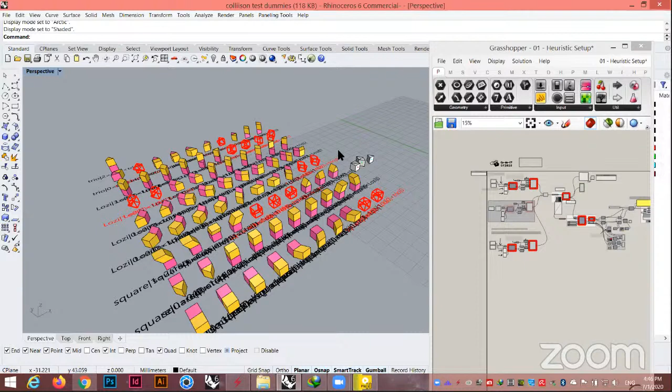So, who is in group with you, Sarab? No, Alberto. Sorry, Shermin, sorry. Yes, Alberto? Yes, here. Do you have anything on your own? Yes, it's another option over the same stuff, but I can share it if possible. Let me make you co-host so you can share.

Okay, you should be able to share now. Perfect, I'll share screen. No, here. Yeah, I'm looking at it. Well, let's reset this stuff firstly.

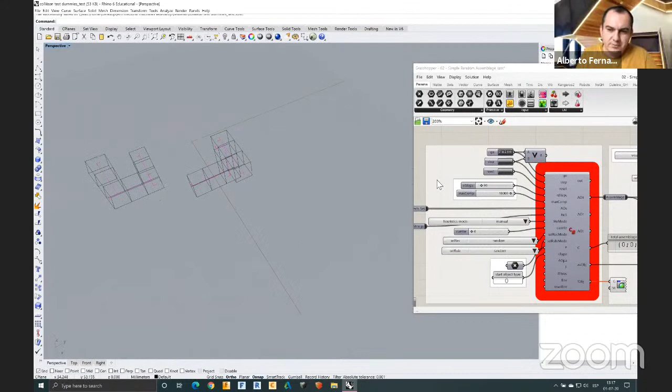So trying to get another approach over the same issue of patterns, I created something like this, and then with two different movements, and then playing a little bit with the code, and then proposing 5 handles in each model with the same size, it's possible to get something like this.

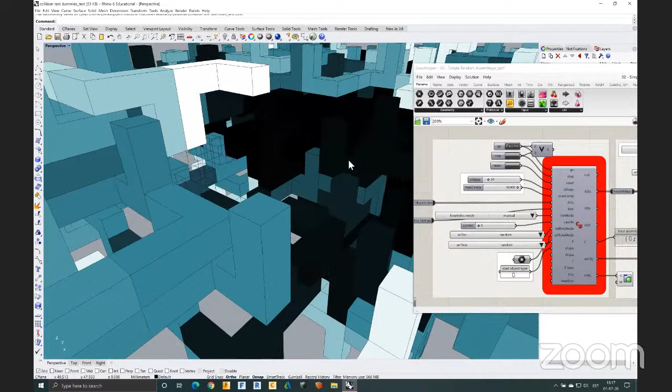See if this is working. Oh, if you hit go, it will probably be okay. Go, yeah. No, but it should be light enough if you're... So it's happening something like this.

Which at the end is trying to find this idea of patterns and repetitions, but playing with some variations. In any way, it's probably possible to mix this idea with the other one, which is these angles, which is prisms or triangles, and then see. But we must mix all these two codes in a single one, I think.

Yes, I would feel like at this point, after seeing your contribution, I would like to give you a bit more pointers, some more pointers to add to what I already said to Sherwin.

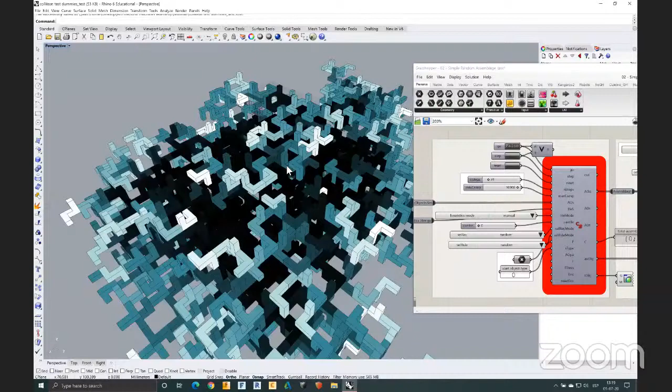In your case, your components are articulated, but their sense of anisotropy of directionality isn't really coming forward. What you get, if you switch the visual to object only so they're all the same color, you'll realize this even better. You see it's like this articulated, complex, Menger sponge kind of object, but you don't see those patterns of directionality emerge because there's little anisotropy in the geometry of the component.

So one of the possibilities to activate this kind of anisotropy is changing the proportions. Just think about the bounding box of your component. You make a bounding box of your component.

Reaching anisotropy, achieving anisotropy can be done in several ways. If the connections and handles basically lead to a sort of cubic grid, that's one thing. The other thing would be considering the bounding box of the component. If the bounding box starts to look like a cube, then most probably, well it depends on the geometry, but most probably the anisotropy is not yet there. The fact that all the angles are 90 degrees also isn't a fundamental factor, but it adds a little bit.

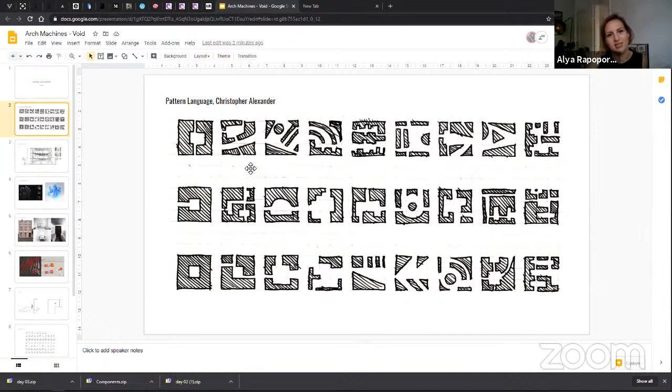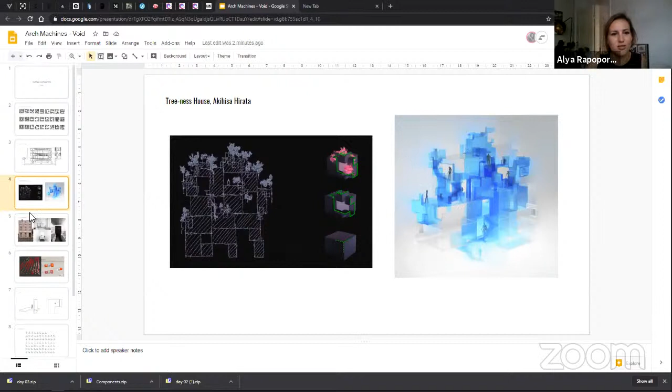So here we're coming back to the pattern language of Christopher Alexander, or looking back at the Salk Institute of Louis Kahn, where you can see there are normal room spaces but also interstitial spaces, creating different volumes inside. Another reference is Tree-ness House, the combination of solids and voids. So this is what we're looking at in our topic.

Then you said it's important to see the progress. So we were trying - my first attempt was like almost everything is red, so almost nothing worked. Then at the end, or now in the process, we came to two components.

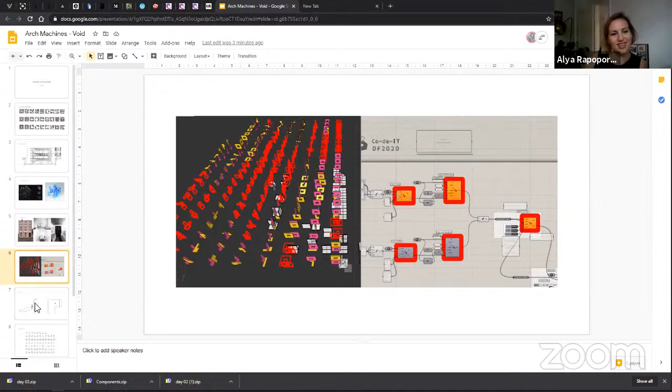We decided not to go with this Amazon box that you described yesterday, to have a series of boxes or shipping containers, but instead to try to find a component which would in itself create this space, with maybe windows or weird spaces looking outside. So far we're only at the very beginning of testing.

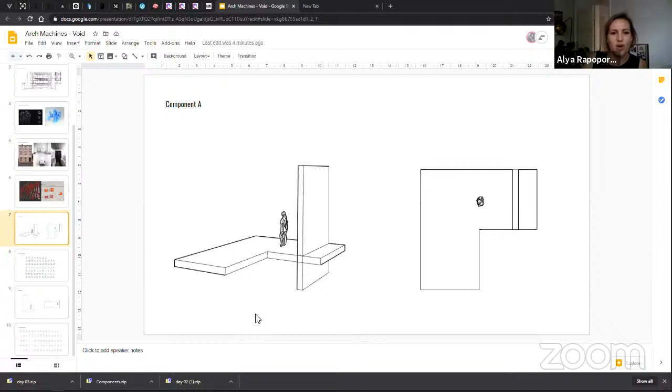We came to component A, which looks like that, and this part we think that when it combines with the other ones, maybe there will be spaces like a vertical shaft or window or a hallway, and these are the iterations of the first one. Then it would probably be interesting to combine it with a different one to see how they will arrange.

And then from here, Nora will share her screen. Okay. Can I do it? Oh yeah, I can do it right away.

I made you all co-host, so you should be able to do it at will. I hope it won't crash - it's a bit slow. Okay, I can see it. Yeah, you can see it? Yes, yes. So where is it? Oh, maybe this is not the right one to have.

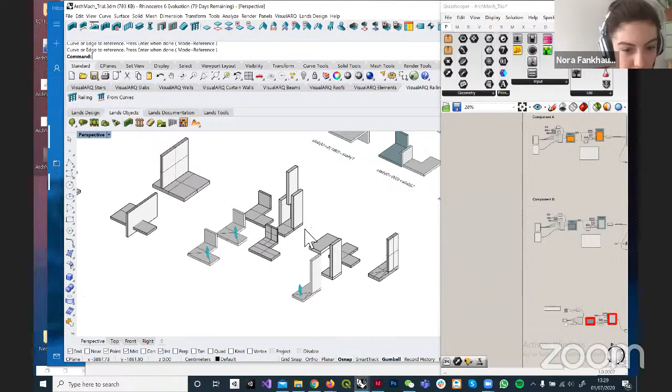So yeah, these are the two iterations. We started with this component basically. That's how we developed - we cut out an edge and then we added slabs on the sides. Basically, first not to have the definition of a room, just that if we cut this out, we could look down, as we just tried to think architecturally. So this is the first component.

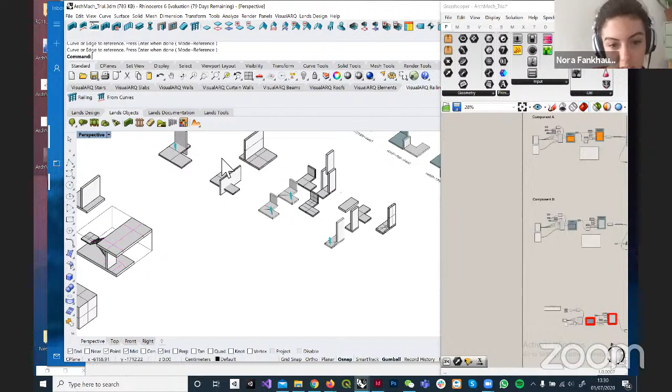And then next step, we're gonna probably try out with this one, jumping from this to this, and then this B component is this one. So for now, we just started to aggregate it. For now we have these ones. We're trying to figure out which are the good connections, because actually we want to find connections that when they come together, the parts kind of already form a space and not just flat like this.

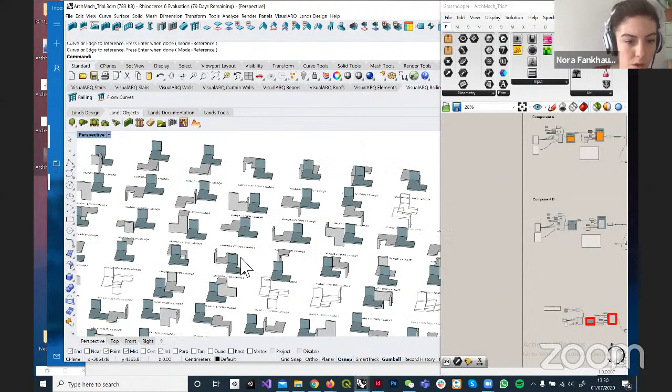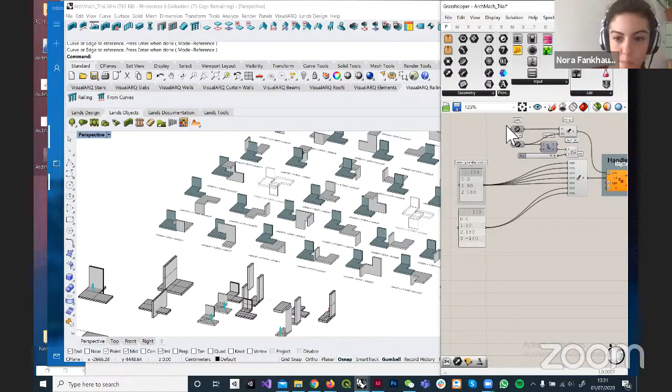So I don't know what the right process would be - just to pick a few and then elaborate more rules for the connections or for the angles. We have here those components. We didn't play around too much, but maybe we can do something with the angles, or replace the handle for both parts, for both inputs here.

Yeah, this is what I found the most challenging for us. I found this is actually trying to understand where to put the handles and how. What is the smartest move for that?

Yeah, that's quite something. Nora, can you leave the screen? Just minimize Grasshopper and zoom in on the heuristic table as much as possible. So maybe type - can you type in the Rhino command line full screen?

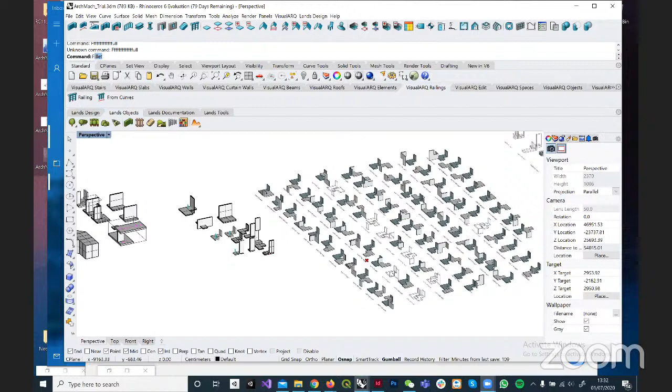Okay, okay, sorry, okay. Yeah, all right, all right. Where do you want me to...

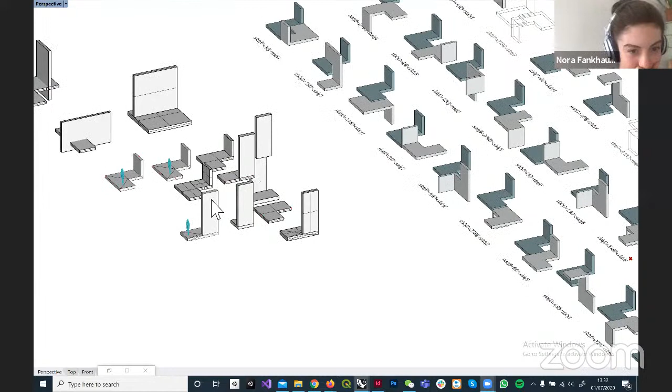The handles, the table of heuristics, so all the combinations. Just this part over here, the small part over here. All right, yeah, great.

I'm just looking to see if there is something in there. But you're right, looking for things like this. I'm looking, I'll tell you what I'm looking for. I was looking for this guy here.

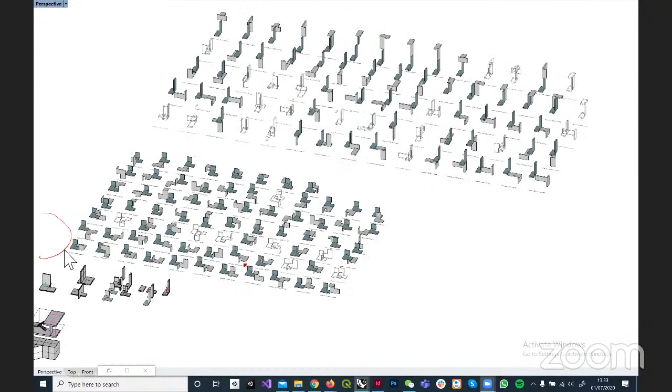So it's there, okay, yeah. You already thought about it, but the way you place the handle, is the kink on purpose? Is the step on purpose between them, so they are not exactly coplanar? Yeah, that's true.

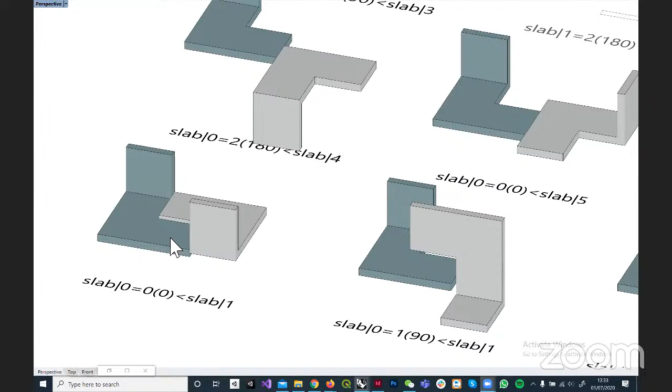Okay, it's interesting because I think in your case there are a lot of selections and tests that you have to do with the handle placement. So can you make a little white space on the screen so that I can sketch there?

Okay, that's quite okay. Or did you want it close to the component? No, that's fine. What I'm saying is, let's see the things in plan for a little bit. So you have your complementary component that can do this also, right?

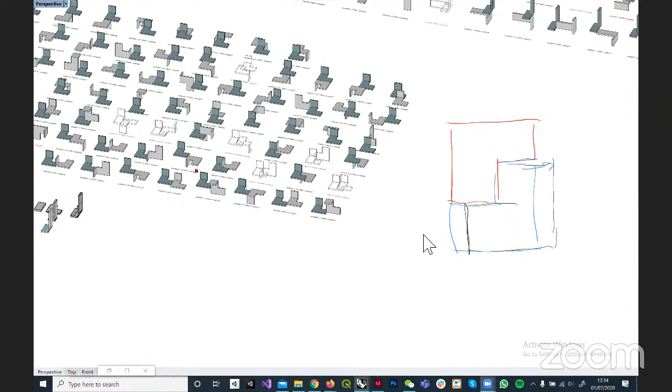So if you shift a little bit something to this side, what you can get is, let me see, a little gap in there, right? Yeah, and then when you assemble the rest, it will start from here and make some other gaps.

And then you can see how it works in the third dimension with an additional rotation of the components, and start making assemblages just by filtering some rules, but trying to go on and maybe see if they react to a vector field, or even do it in stages—use a single or a couple of rules that work well together for a certain stage of building the assemblage, then save it, then load it as a previous assemblage and use a different set of rules.

Okay, and try so that you can differentiate the areas. You can grow in stages or grow in parts, it's up to you. So you gain a little bit of confidence with this.

It's going to be interesting also because then you might also have the possibility—I don't know, that may be too much. No, that may be too much. So let's see how we go from here with this.

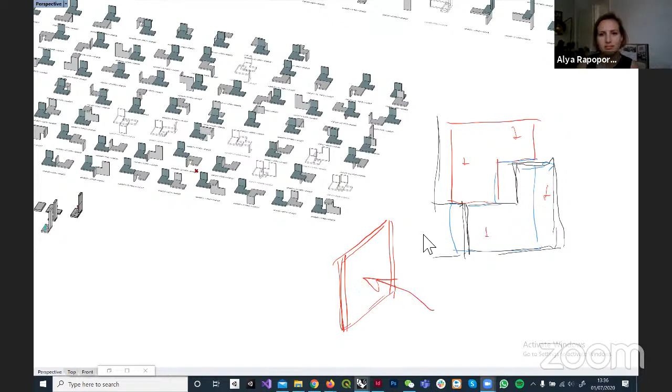What is it? I was just speaking my mind aloud—the basic idea was, what if you had a third component which was just a single slab? But then you place some handles of a certain type just for this guy here. You know, you have like a type 3 handle, or I don't know how many types you have already.

But you basically have just a type 3 handle, and these guys are just type 3 handles. So at some point when you assemble things, you can put also this thing. Or you can have placeholders in the component and add this sort of element as a post-processing thing, so you can locate areas, enhance density, or do some sort of post-processing operation that will...

Oh yeah, another thing came to my mind, and this is something that I'm not seeing here—to allow the components to accumulate, flat face over flat face.

Yeah, true, we didn't put the handles on the top. So yeah, let's say that you have this object—I'm simplifying things a bit, okay, that's not your component, but it's just for demonstration. Let's say that you allow another object to do this.

And behind the back of the other is something like this. So they basically can stack up one over another. Okay.

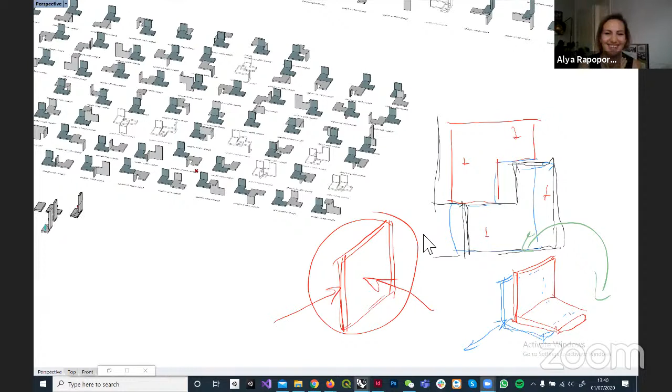Okay, and do you have a tip how to really fast and smart place all the handles? Not so much, it's not... You're already on a good path on placement, but think about exactly what I said.

Just start. You can start with the obvious, and then you can start by playing with this offsetting or sliding the parts one way or another, or using the spots that you have. For instance, the spots on the edges, so that you allow yourself to use also the thickness of the components to connect to the edge. So you have, in sections, situations like this one.

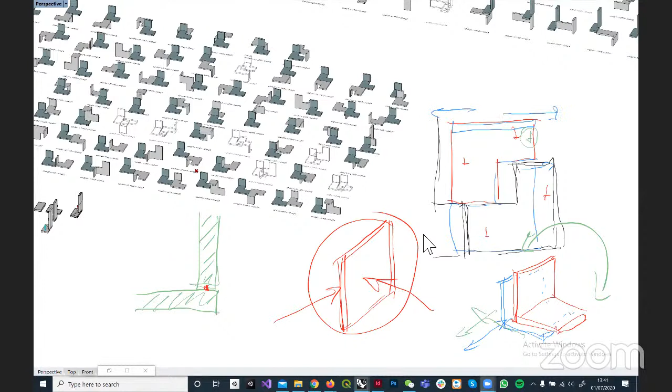And you get this one by placing the handles in this position, like half of the thickness in from the border. And then according to the position, you can have your elements go completely coincident, or again, you can slide them a little bit one way or another so that they are basically almost suspended, and when something else comes in that doesn't conflict, they might be complemented by something else.

Great. Oh, is the screen frozen? No, no, sorry, no, you can move around. I mean, you didn't sketch anything more. I didn't sketch anything. Oh no, okay, sorry, I'm getting a mini heart attack. Okay, very good, okay, we got it. Okay, thank you. Thanks, welcome.

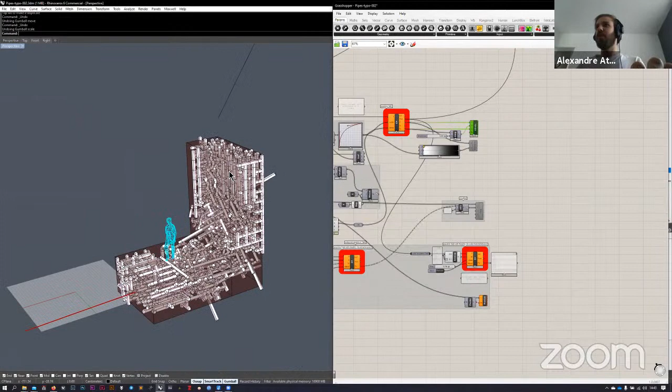So I just scaled down a little bit my main component, and I tried to add some 45 degree angles in the pipe connections. I also increased a lot the size of the bars, the big straight bars. And now I modified a little bit my vector field in order to have it on the x-axis, then it became random, and then it goes on the z-axis in order to make some interfaces with some other blocks, or the same.

Alexandre, can you just hold for a second? Just one quick technical suggestion: I think your field has a resolution that is way too high. You can reduce the resolution, make it with a lot less points. Yeah, I will do that. Okay, just this, yeah.

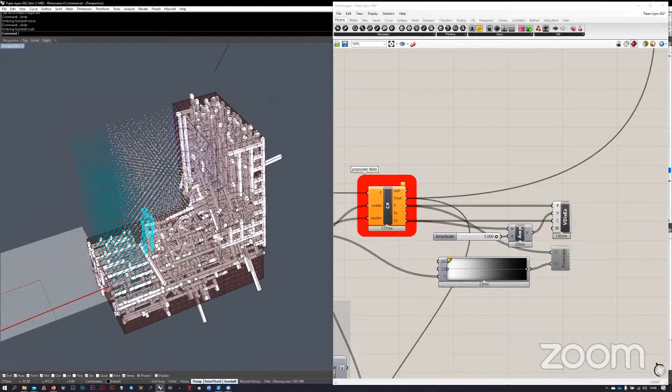And then I just tried to see how two of these blocks can connect. So because of the crazy density of the thing, we don't see any problem at the interface in the middle here.

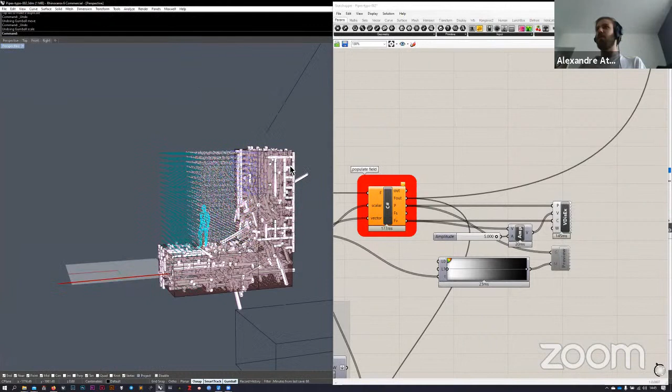But now I really want to manage the density a bit more, and with what Jan will say just after, we'll see some more oriented blocks, like profiles that can go this way, or with some angles, but this is more of Jan's work, this part.

I think I still have a lot. I have one problem, which is that I cannot use the human plugin. I cannot select manually the selected preview.

Double click on the lock. You have to, sorry, this is something that maybe I forgot to say, but I think you also have to enable the preview on that component.

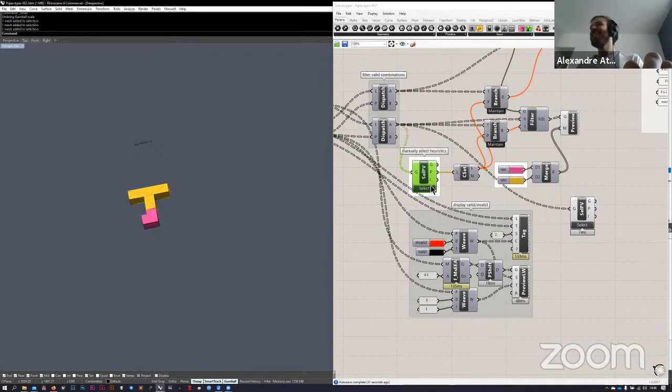Like this? Yes, you should be able to select now. Oh okay, that's it. Okay, and so I also noticed that it might be that sometimes when you open a definition, that component is flashing red.

In that case, you have to substitute it with a new instance of the same component. You just drag it from the Grasshopper interface, reconnect it, and with the new component you should be good to go, in case that happens.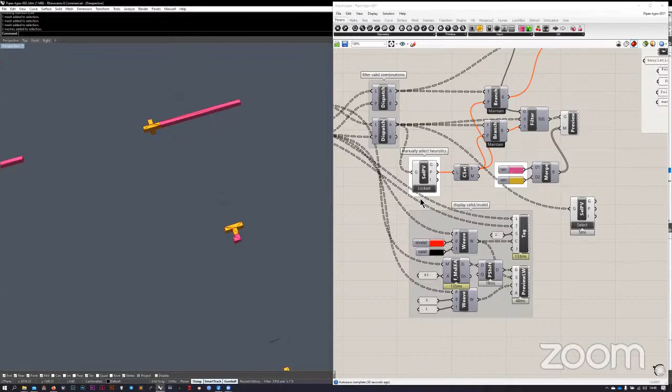Okay, I see. So now, because I have... Yeah, I think I mentioned that you have to enable the preview, but I mentioned it pretty fast, and it might have gotten lost in the streaming. Okay, don't worry, it's okay.

So this will be a way for me to manage it, because I have a crazy number of combinations. So I will try to drastically reduce that.

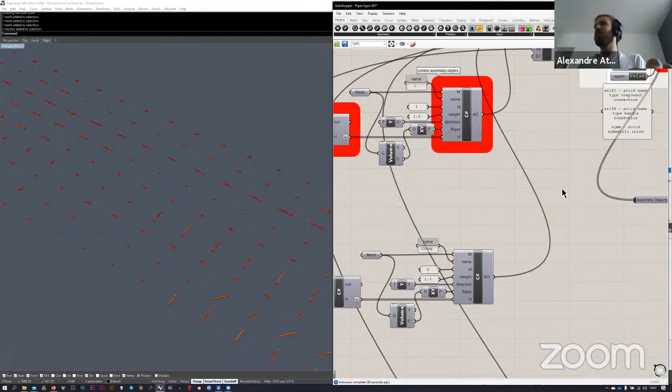And do you have a lot of rotations in there, by any chance? Yeah, I have too many. Not always, but it depends on the block actually.

Because if the block has at least two axes of symmetry, two central axes of symmetry, you can basically keep the rotation at 0.

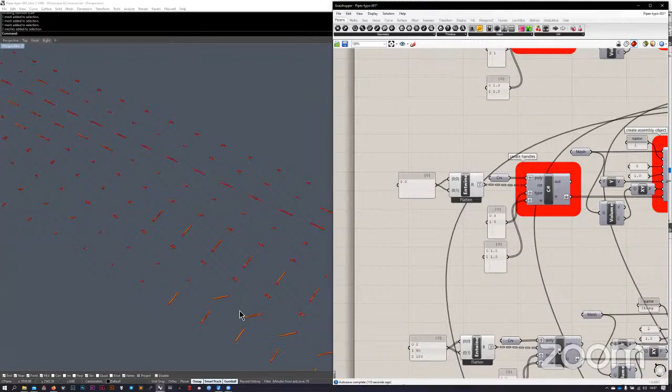Or I could just also... try, because the symmetry can cause you some troubles, because in some cases it might be that the symmetry filters out the possibility of a component to be a receiver, and then one component becomes only a sender. Okay, this is something that I realized, so I have to improve this kind of symmetry filter.

The first part where I would act, if I were you, would be into reducing the number of rotations to the bare essential, or to something that actually really makes a difference, because otherwise you will notice that you have a lot of identical combinations.

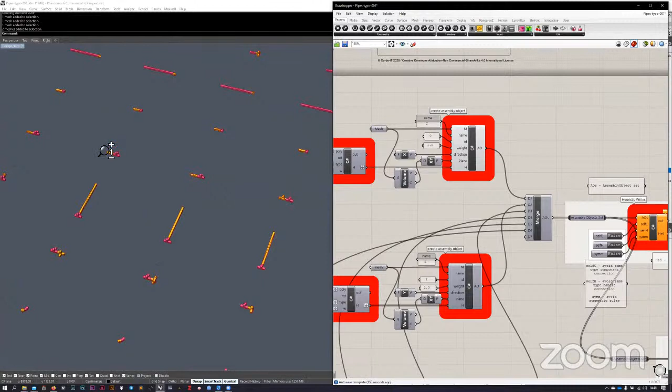Yeah, here I see I have a lot. Yeah, these are all the rotations of 90 and 180 degrees on a square figure, so it doesn't change anything, right?

Yeah, but just a question about that. For example, on this connection here, should I keep different levels of rotation or not? Because this can be oriented in different ways and it will change. Yeah, but I think there you have like 3 rotations that make a difference.

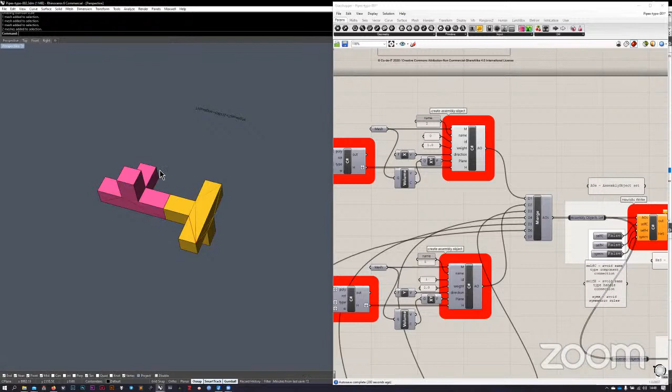How many? Probably 3: 0, 90, and 180. Okay, because then you will have, I think so. But you could make a different type of handle for that, or just give...

...the same type of handle, but just give those rotations to those handles in that kind of component. I mean, the stick, I would really keep the rotation of the stick to 0 degrees in both. I kept 0 degrees here.

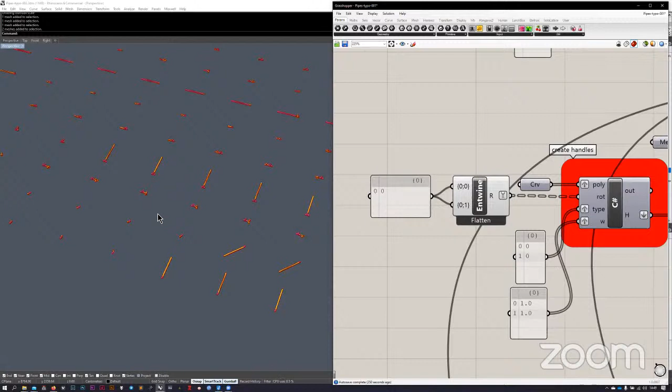Okay, so probably a good idea would be to make 2 different handle types in the same position. So one handle type is for the connection of the T-shaped components to the other T-shaped components, and then you enable the rotations. The other handle type is just for the stick, where the rotation actually doesn't count.

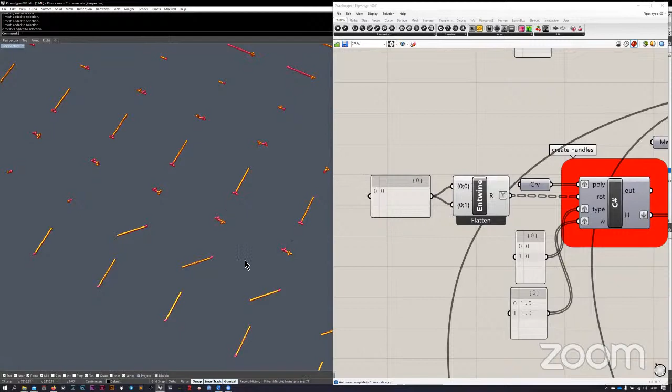So I think that would solve the problem of redundancy in all the combinations, because otherwise you're literally looking for the needle in a haystack, almost literally. Yeah, I agree, it's too much.

So yeah, I think for me, this will be all. Just some quick references if needed. But it was about, I had this kind of pictures in mind. Like, why doesn't it...

Yeah, so maybe Jan, you want to? Yes, I would like to see also if Jan has something. Then I will make a commentary on both of you. Okay, I will share the screen with Grasshopper and Rhino.

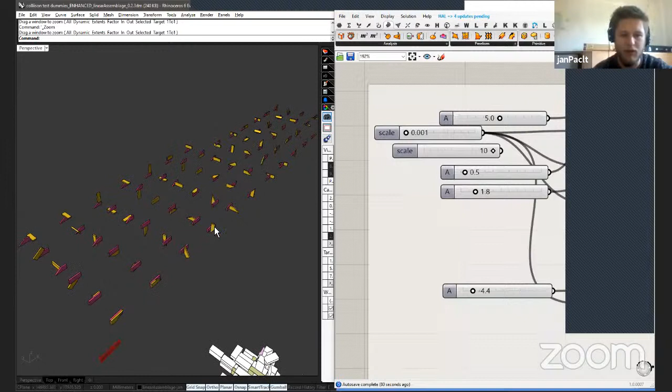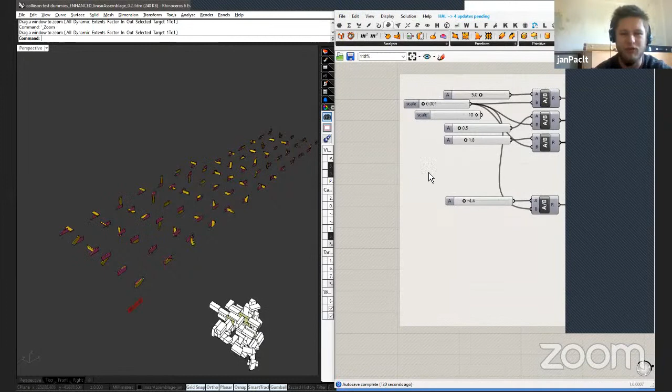So I shifted from the linear elements, which I tried to explore, because I actually want to make space for Alexander's elements. So as Alexander showed these red boxes, I am now developing the language of those boxes. I took one step, maybe that's procrastination, but I wanted to get a sense of what kind of spaces I can generate with different objects. So I parameterized the boxes, I can change the proportions of them and some angles and stuff.

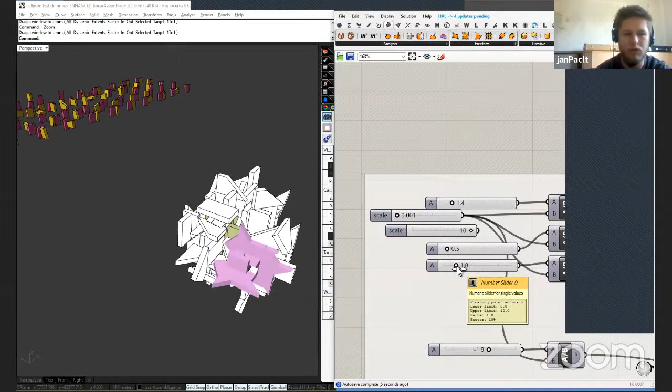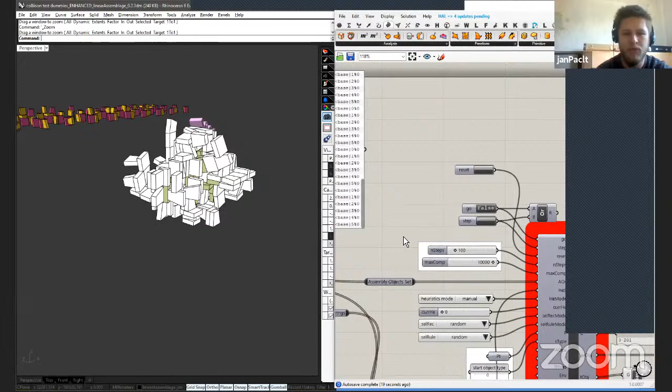Then I managed to populate and make the assembly. For example, here I can see it creates something like slabs. If I change the proportions to something more like boxes, then it has a different character, and I want to use this tool to create interesting spaces for those pipes which Alexander is designing. So far it doesn't have much sense in terms of connectivity, so I'm going to stop this exploration and focus more on precisely designing the handles and stuff. But so far that's what I got, and I can also show the reference.

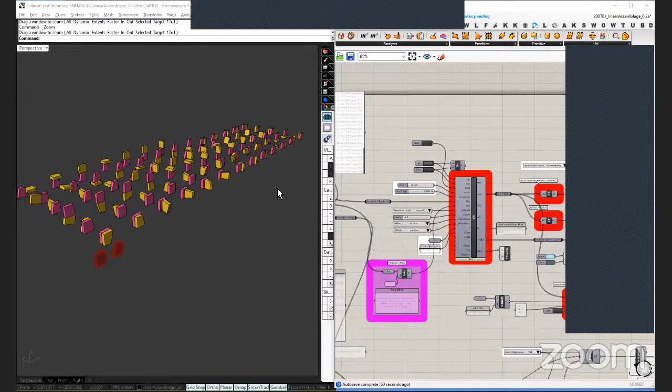Let me change the screen, maybe if that works. How do I change the screen? Second. Can you see the image? No, maybe you're just sharing the Rhino window and not your screen. I'm still seeing Rhino and Grasshopper. Okay, and now? So if you share, look if you see something. Okay, now I see the picture.

So the idea is that there are some denser areas. Eventually I would like for each object of mine to create some kind of value for Alexander, so then he can populate it dense or less dense or more dense based on this value. So I want to create this generic structure.

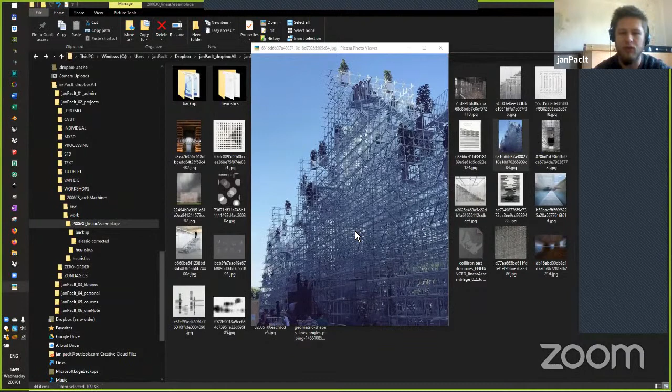Maybe play with the transparency. I'm not that sure if I can manage, but then the density will be added by the detail of Alexander. So that's for me, I guess, the progress.

Just to add a little bit about the density that you said, we said when we were speaking together that maybe for my part I could have several versions of the same assemblage. And then when Jan is doing his own big assemblage, we can dispatch some instances of the blocks according to, I don't know, attractor points or things like that, to replace the global geometry which he designed, with one of my different versions that is maybe very dense, a little dense, or very light, things like that.

Yeah, okay, that's along the line of what I had in mind when you did the proposals. Can either of you share the screen with a blank screen so I can sketch like on a canvas? Because otherwise I cannot share from my tablet and sketch on it. Otherwise I would do that. So just maybe an empty part of the frame. That's perfect, that's okay, that's fine. Okay, so—

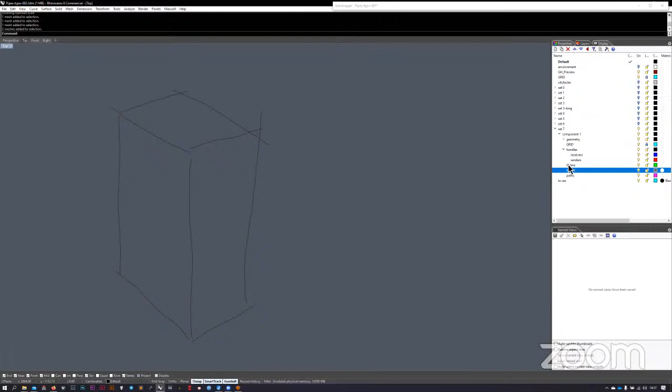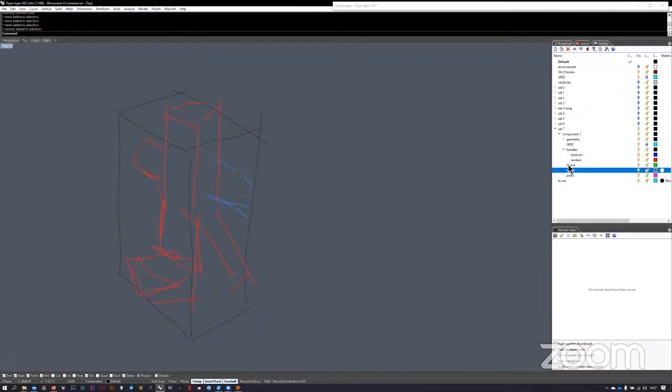One of the possible ideas would be to start with experimenting with a few but large-scale objects—they don't have to be too many, but a number around ten or something. So you create different versions that have different possible handles, or try to do something that, as much as possible, doesn't have too many elements, but has connection points that can be used and be modular with other objects on the same side. So in the end you have a macro object, and you can place some handles to say, okay, this is the row configuration, and it doesn't matter what happens in here—we have the possibility of connectivity right here.

But depending on what we decide to put inside the object, something will connect, something else will not connect. But instead of a huge cloud of stuff, you have fewer elements but larger. So if your stick is something like this, you can design also another element, which is a larger pipe that has a larger section. Up to you how much contrast you want to introduce into the difference in section. And then you can design intermediate components that handle the change of section from one size to the other.

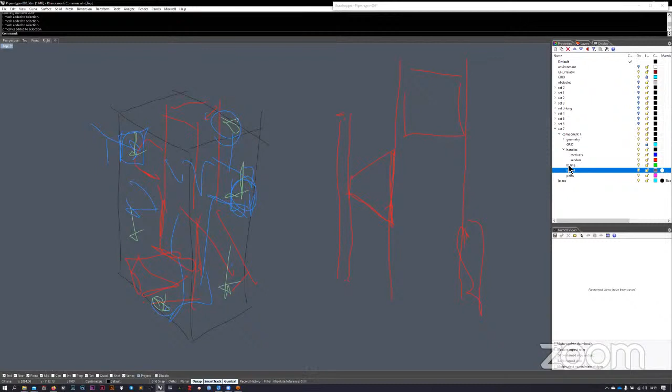Because then when Jan tries the volumetric assemblages, you can start by placing the rough big pipes, which will have all these possible positions for adding joints. And then once you have part of the assemblage, you can start populating it with more or less dense assemblages of the smaller parts of these.

Do you get what I mean? You can work in density locally. Let's say you drive density through a field, through a scalar field, through a vector field. But then you maintain the possibility of enabling a combinatorial assemblage of larger elements that will then acquire even more differentiation when you start populating it around with the smaller ones.

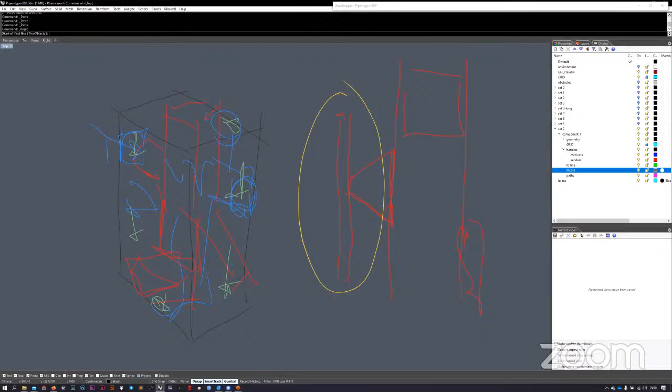So technically, you can have the first set of heuristics and pieces that are the larger assemblies, the larger pieces. Once you have laid those in place, you can start from those as a previous assemblage, and then you add to the set and you work with the smaller ones, rules that only involve the smaller ones, and these components to transition from one scale to another. So you don't add any more large elements, but you use the large elements as a basis, as a placeholder to start the other densification in smaller scale.

So you work in hierarchies in your structure. Okay, yeah. Those will be like some sort of a frustum geometry right now, literally something like this. Okay, yeah, I see. From a bigger square section to a smaller square section.

And just, okay, no. The thing is, just a question.

Everything that is in red for you, it's Jan who is designing this. Oh no, Jan is designing the volume in black, and then of course he can help you designing also the things in red. Let me use just the green. This one, the smaller one is in red, but it should be another color because it's a different hierarchy. Okay, I think I understand you. I'm out of colors, I have just 4. Sorry, okay, no but okay, it's right, yeah, that's it, okay.

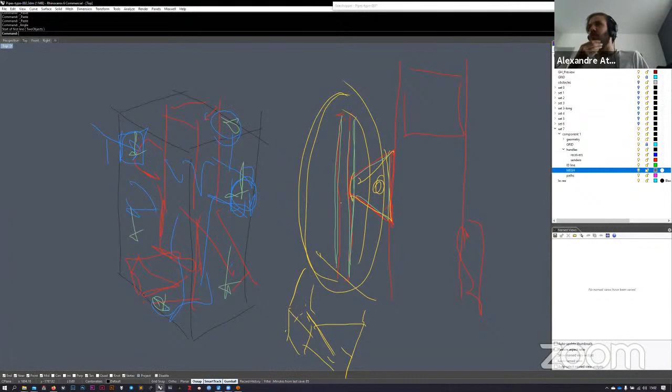So I think the basic idea is to try to capitalize on the fact that these objects that you design with the rough initial few large pieces, they can still be modular when you distribute them in the assemblage. So they will form a first, still heterogeneous grid, but based on combinatorics.

And then you add another layer of complexity by acting with this additional assemblage of transitional and smaller scale elements that add a further hierarchy, and then you can heavily differentiate things locally, even with a vector field. So if you want in some places to privilege a lot more diagonal connections starting from these pieces, or more vertical, more horizontal, increase the density, it gives you that intermediate placeholder grid of elements that then will be not just a regular grid, but a grid generated with the assemblage of the larger volume pieces.

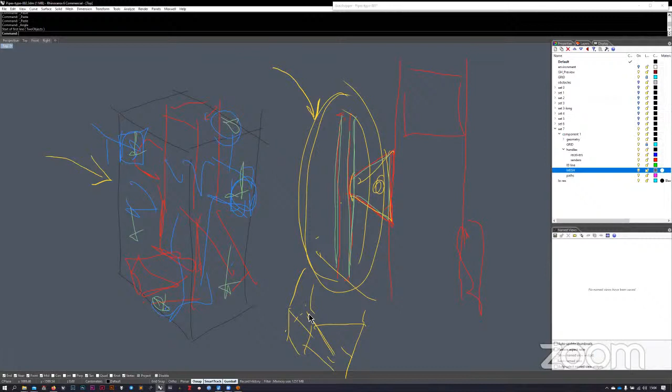Okay, I mean you can even design this as a module with the handles for the placeholder. You can even design like 3 or 4, even manually if you want. They don't have to be especially generated, because then the rest of the thing will be done in the phase where you actually start the assemblage of the smaller pieces.

I see, okay. All right, yeah, thank you. Interesting direction.

All right, who's presenting next?

May I show something? Sure, yeah, sure, I'm going to share my screen. Okay, can you see my screen? Yes, I can. Okay, perfect.

So I got some pictures which I got inspirations from, the game named Monument Valley. It's also, all right, yes I know it. Yeah, yeah, so I got 2 components.

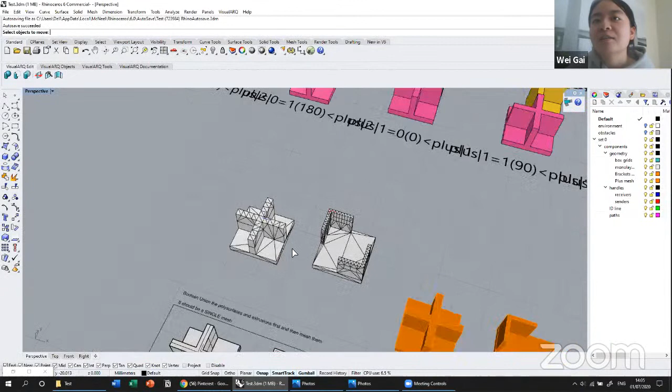So it's like, so when I'm trying to put them together. Yeah.

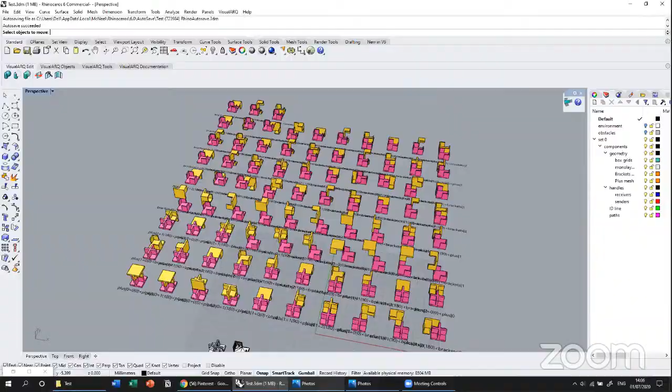One thing, can you show again the first picture? This one? Yeah, this one. Can you notice anything missing in your components? The stairs, maybe. Yeah, exactly.

I mean, this, or even do you know those Indian temples? They were like wells, then later became temples too. The Indian stepwells or temples, called stepwells because of the well. You know them very well, Sarab. I think they are beautiful pieces of architecture, for me.

They were actually one of the inspirations for a topic for one year in my course at the university, because they were a very interesting intertwining of not just having vital access to a resource like water, but that became the occasion of building something that extended to social rituals, to society, a place intertwining access to a necessary resource with the rituals and daily life of the entire society gravitating around that part.

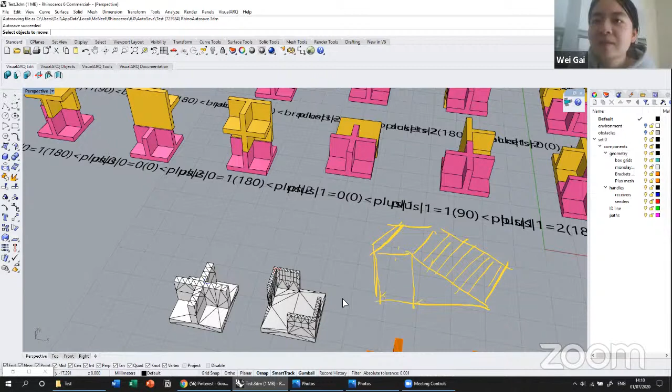If you look at the picture, there's one element that could really be a sort of a wedge, a little more than a wedge. Then you can include the stair right here, and you have this proportion. This proportion here can really be a cube, so you can attach it in different directions. This stretch over here—it's up to you if you want to make it twice the cube, or exactly 45 degrees, or another length.

Then you might have some other elements that complement this initial element, so you can create spaces. Maybe not just stopping here, but having another element here, so the block is more like this. This is something you might have to test and try, or probably go for something like this, where the modules are like two cubes, but you connect them like this, and the profile becomes something like this. These are all things you can try in the design of your components.

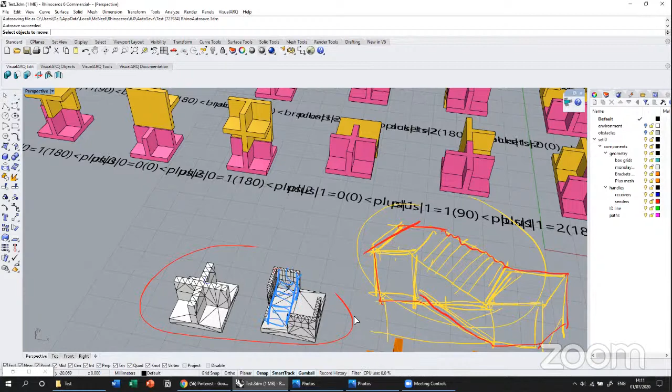The other possibility is to keep somehow something like this, work on it a little, and then add the stairs as a possible additional geometry you add in post-processing, given certain conditions in the assemblage. These are two possible roads. The goal is, of course, to get a lot of these in there—actually the stair becomes also your ornamental pattern. So you can also search for patterns within the pattern to add the stair once you have your assemblages.

Okay. Okay, thank you. Welcome. Let me clear here. So we are just missing Andrea and Saraub. Would you like to comment, Andrea?

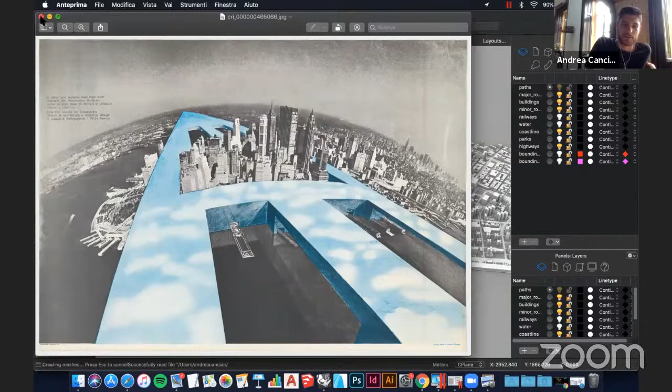To explain our situation, we were working in parallel. I was working on the bigger scale with vectors, fields, direction, and bounding box. To give a reason for a specific shape of this bounding box, if I can share my screen—yes, I can. We took this as inspiration for the bounding box, just for the bounding box, and then wanted to populate it inside with the algorithm. So we needed this testing ground. I built this portion of Manhattan Island, just to have a real reference for how to manage this bounding box.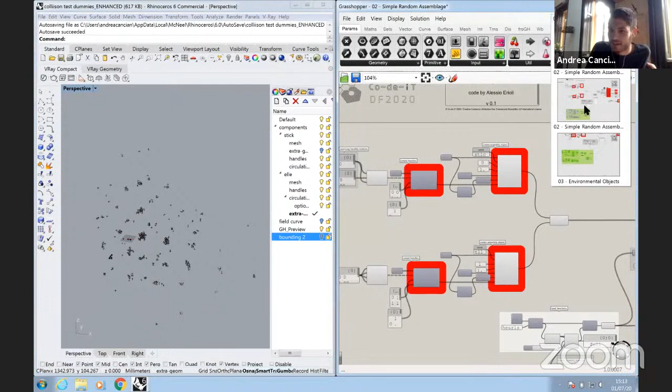But then when I switched to the things my fellow mate has done today, I encountered this problem that I didn't have this morning. This was an error I never saw. Look at the heuristics that you're using. Yeah, I switched, I tried to.

No, look at the names that are in the heuristic. Not this one, not this one. No, the heuristic string, where you have the list of rules. You see there on your right. That one, oh here, heuristic rules.

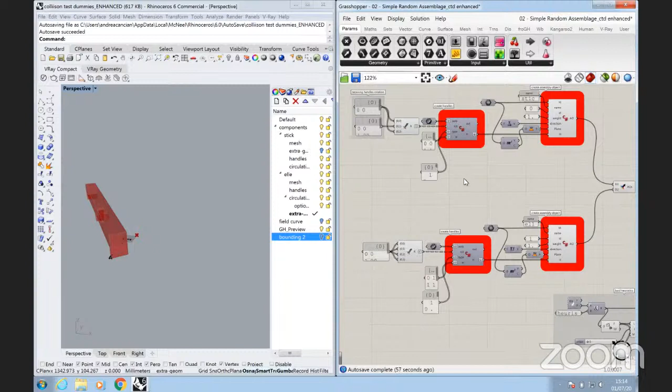You see, you have a component called B. What is the name of your components in this definition? I don't know, there's a name. Yeah, you see, you have to change the name of your components here. Because you still have the names called stick and elle, while probably he called them A and B. Here, stick, yes, you have to change that to the names.

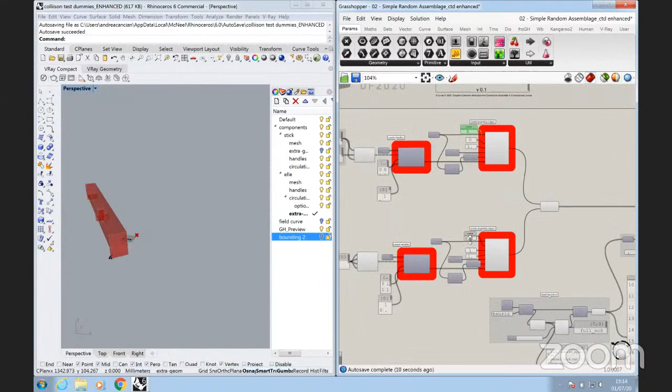It should be the same name that's in the heuristics, and then the problem will be solved. B and 0, yeah, no, 0 is the handle. No, so A and B, yes. So change the other to B, and you should be okay. No, this is because I didn't manage.

Okay, yeah, okay, hit reset so it loads the heuristics. Yeah, it should be okay. No, but hit reset in the main component. Ah yes. So you should go, yes it's loading. No, yeah, no, it's working, right?

No, because you still don't have the right geometries. So you should copy paste the entire first part with the right geometries for your component. Okay.

And then it's... Saurabh.

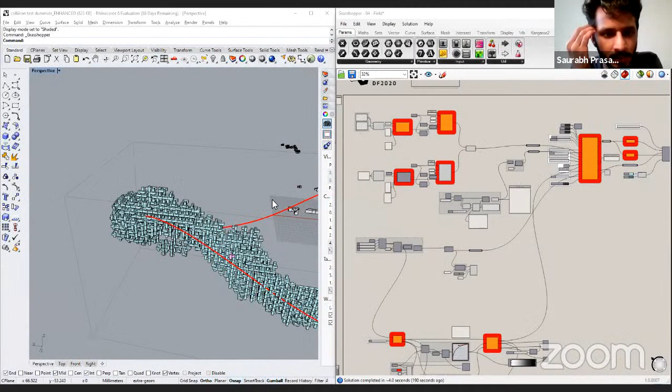Sorry, I have this change problem. I mean, I was testing it with... I'm sharing my screen in parallel. I was testing it with the vectors and the curve, the scalar, but I'm not able to find out where it is going wrong, up to the point that it picks up only the first component that I put, the start object.

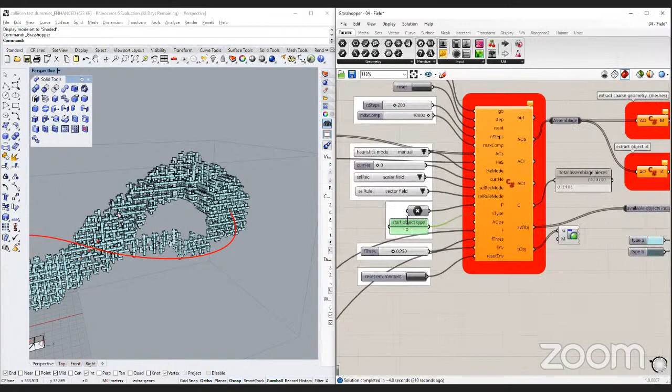So for example, here when I put 0, it only picks up the 0 and multiplies it. And if I take 1, it just takes that, and I'll just show you.

How's the heuristics that you're using? One sec. Oh shit, I think I killed it. Too many clicks. Okay, so yeah, where are we? Here. So I saved this particular heuristic at the moment.

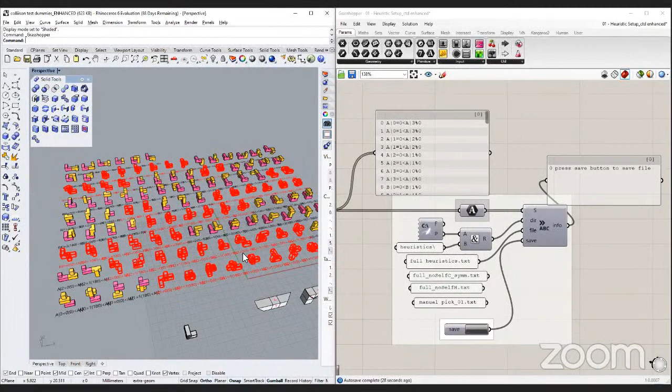Can you notice one thing in the heuristics? I think there's something there. Probably A and B are not compatible, because you have a lot of discarded combinations for incompatibility. But if you scroll the text of the heuristics, you will see the rules there. You see that A only goes with A and B only goes with B? Yeah.

That's the source of the problem. So this is the reason why when you start with one component, it only aggregates more of the same, because there is no rule to switch from one type to the other. Okay, alright.

Probably there is—if the two geometries are supposed to be compatible, look at the placement of your handles, because the combinations are discarded only if there are compenetrations between the two geometries. So one of the things you have to be careful about is to be very, very precise in modeling.

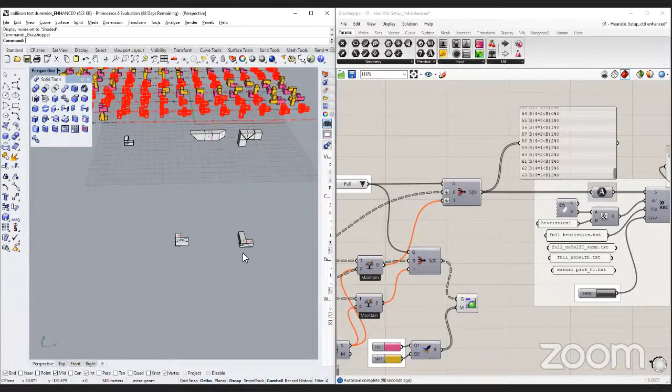Okay, so right now the things that I see in red are only because of the clashes, am I right? Yes, there is collision between the geometry of the two components in the red ones. It's very precise and very sensitive. I mean, he is correct, which means there might be a slight imprecision.

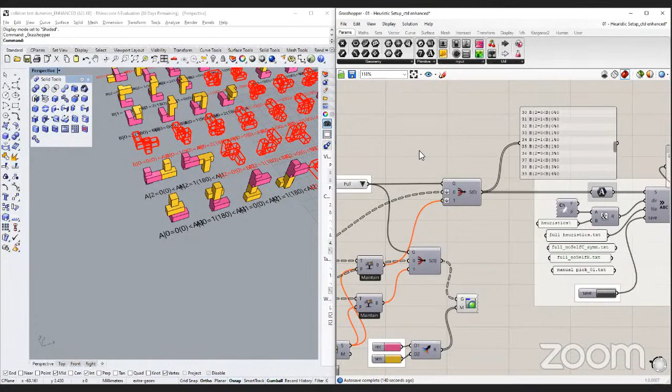I would say that if the two components are supposed to go together well, maybe one of the handles is slightly in and not exactly on the same plane of the mesh face. Okay, I was under the impression that the pink and yellow color I see is actually component A and B. I did not give attention—no, pink and yellow, you see the colors at the bottom center of your screen. Yeah, it's the sender and receiver color. I get it, exactly, it doesn't distinguish by type, just by who's the sender and who's the receiver.

So this is just a modeling precision error problem at the moment. I think so. To be sure, I should have a look at the file, but I would put my chips on that.

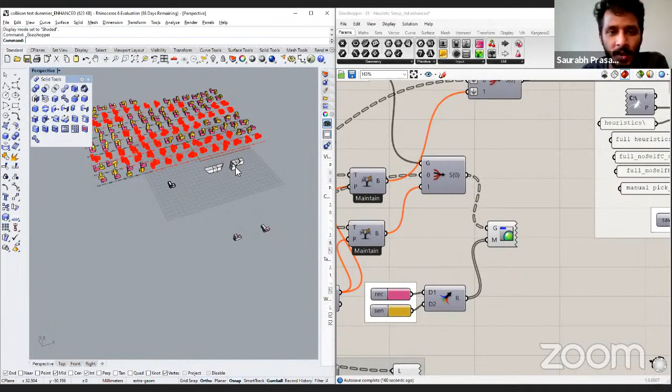Should not be a hard one, I hope. Yeah, all right. So nevertheless, although it's not what I wanted to have, the outputs I wanted are actually culled.

But when I put the vectors and the scalar on top of it, it develops and I get a little bit of directionality. And the intention was that once...

Adrian is, I'm sorry, how do I say your name? Andrea. Yes, Andrea. Is done with his test bed, we would try to have an actual test bed and try to come up with something out of it.

Okay, well first of all, let me start with this. Andrea, you did model only Manhattan. You didn't model the entire USA. How come? I know you can do better. Come on.

No, I'm kidding. I mean, that's really good. That's way more than you need. But if you're comfortable with that, absolutely no problem.

He happened to have it ready, so we thought we could use it forward. Actually, okay.

Can I ask on demand to have other pieces of other cities if I want? No, I'm just shamelessly asking. Yes, of course, 200 euros each one. All right, smart guy. You know how to market yourself.

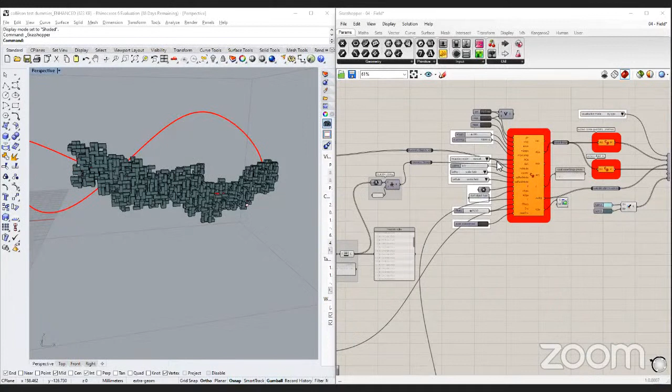Yeah, okay. All right, that was about it from my side. Yes, sure.

Go on. Or did I, I don't know. I thought you wanted to say something. Oh no, that was about it from my side. Ah, okay, sorry, I misunderstood. I thought you had something to add, actually. No, it's fine.

I'm not sure if what Andrea said was clear enough. We were thinking that we could pick up some kind of neighborhood which has very varied volumes existing, so let's pick up the edge from Central Park and the skyline immediate next to it, and the insertion of this whole assemblage was somehow on that point.

Ah, all right, no, okay. Then I think I got the input in the wrong way. But yeah, go for your idea.

But that said, I think part of the things I said in my comment still stand. Do not be afraid of pushing boundaries with what you're doing, because sometimes it's exactly going where you haven't tried before that leads you into someplace interesting. Okay, curious to see your developments then.